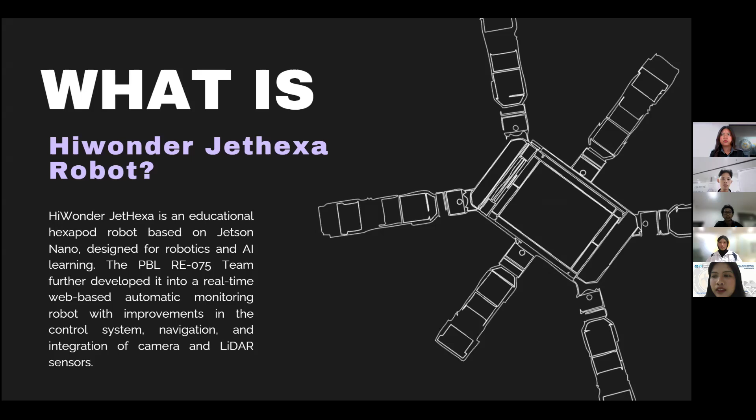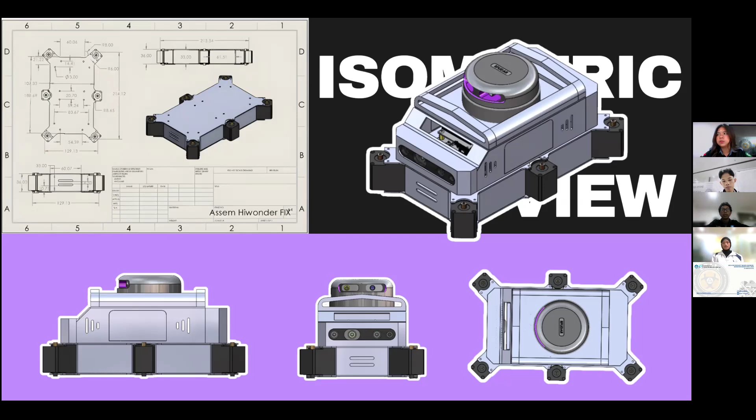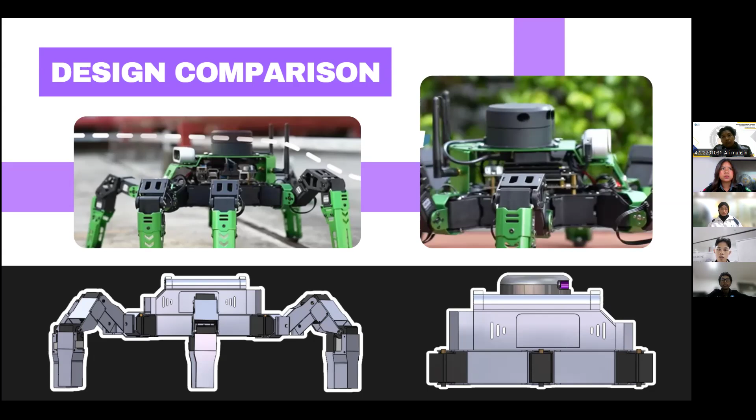In this slide, I will explain the latest design of the HiWonder arm robot. The development I worked on focused on the mechanical design, especially the arms and legs part. The new design looks more closed compared to the previous one. The reason is to protect the components inside, especially the servos and wiring, from water splash or dust when the robot is tested outdoor.

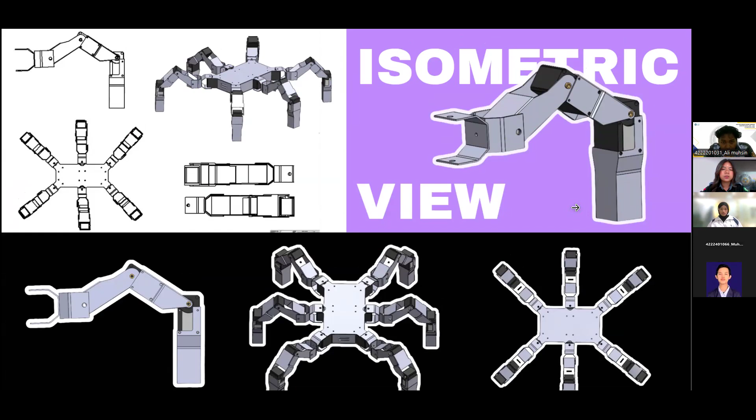Here's a comparison design, the latest one and the previous one. This latest closed design also helps reduce overheating from the sun when the robot is used outside.

From the appearance, the new arms look tighter and stronger because I combined several parts, such as: the bracket mounted to the servos at the main body, the coxa mounted to the bracket, the servos mounted to the coxa, the femur mounted to the servos, the servos mounted to the femur, and the last is the foot mounted to the servos. All these parts are connected using HX-35H servo bus motors to keep the movement precise and strong.

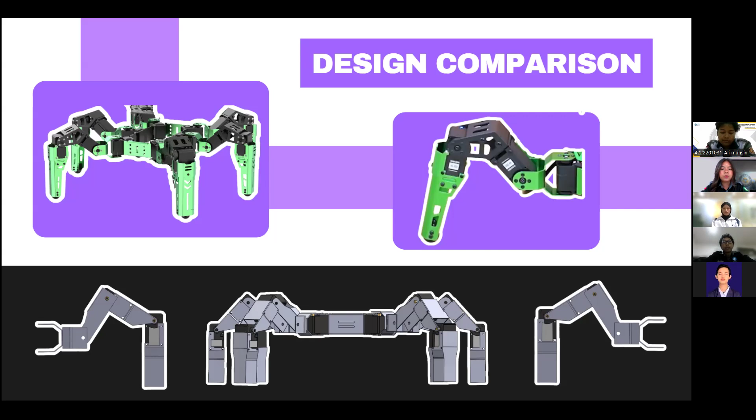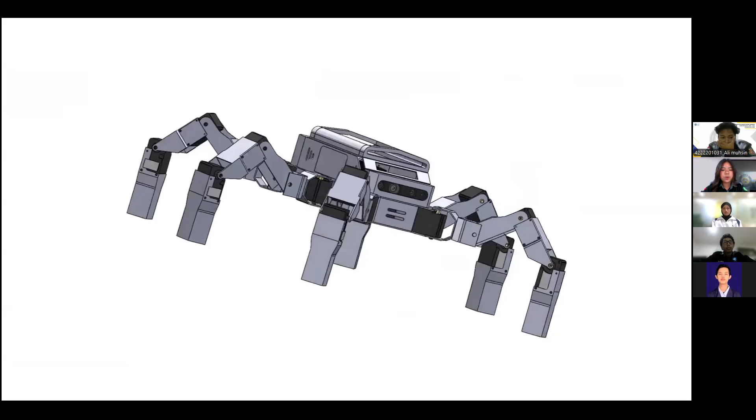My goal after my term is to simulate in Webots and analyze the current design for flaws before we proceed to new design fabrication.

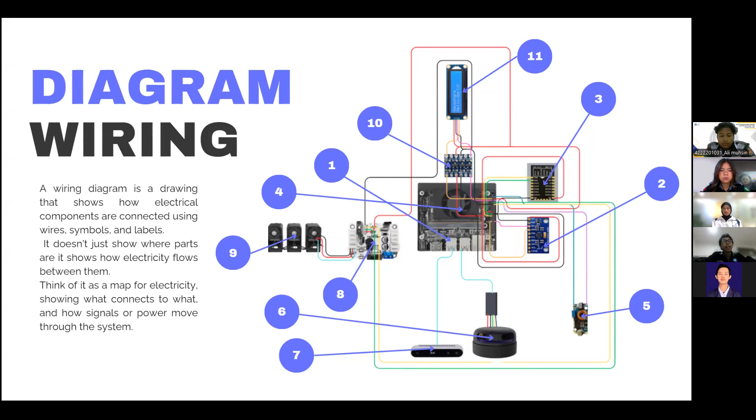Okay, I will give a presentation about electrical design, and first I will explain my wiring diagram. As you can see, it shows how to wire each module to the Jetson. For the components, you can see the names in the next slide.

We should use one Jetson Nano, one MPU 9250, ESP12S, Jetson fan, a buck converter, LiDAR, the camera, servo controller, bus servo motor, level shifter, and LCD. For each component, you can see the quantity here.

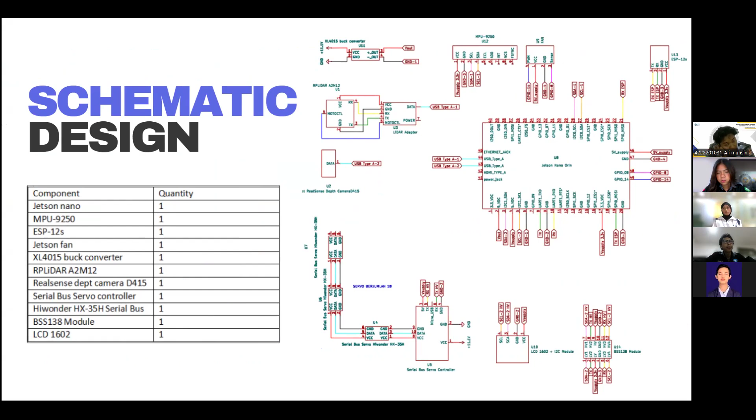For schematic design, I will explain our wiring approach. To supply the Jetson Nano, we use 5V DC pin number 2, and for GND we use pin number 6 GND from the buck converter, because Jetson Nano can only take a 5 volt supply.

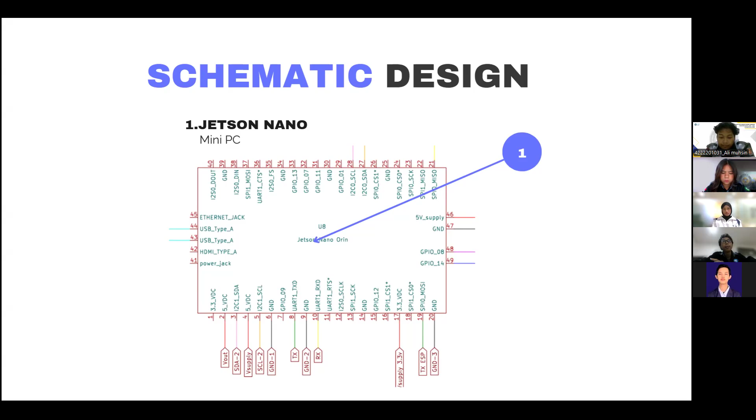MPU supply directly from Jetson Nano. Jetson fan supply directly from Jetson Nano, and ESP supply directly from Jetson Nano. For the buck converter, P in plus and P in minus...

connect to the battery supply, and P out plus and P out minus connect to Jetson Nano. For LiDAR and depth camera, they connect directly to the Jetson Nano.

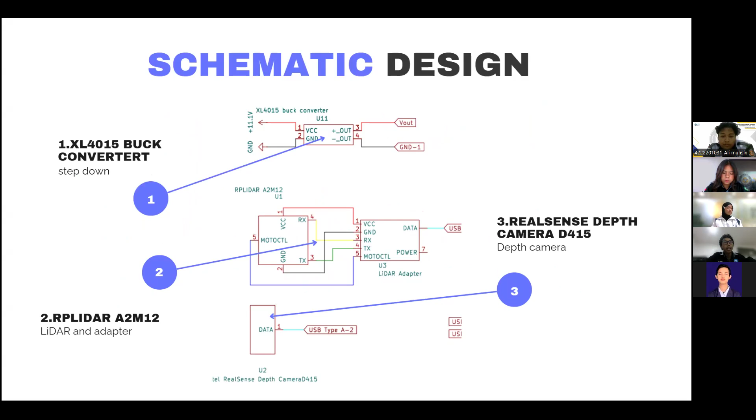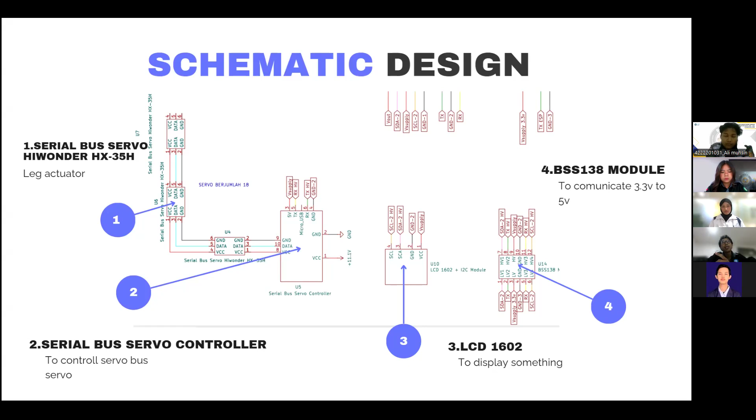Next, for the servo, first connect the servo to the servo controller, and the servo controller gets supply directly from battery and is controlled by Jetson Nano, because the servo controller needs high voltage to turn on the servo. The LCD connects to a level shifter, and the level shifter connects to Jetson Nano, because the LCD communicates at 5 volts, and Jetson Nano can only handle 3.3 volts.

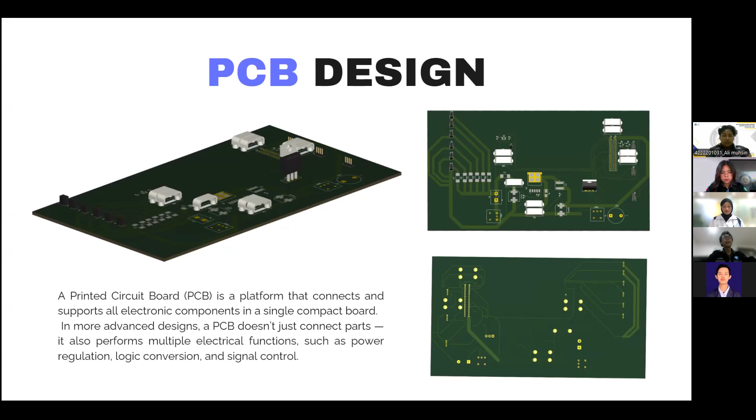If we still choose to make an integrated robot instead of a modular robot, I designed a PCB to replace the PCB in the JetHexa robot. This PCB has 5 main functions, which I will explain.

As you can see in zone number 1, this is a terminal for the servo serial bus driver, for controlling the servo. In zone number 2 is a buck converter. In zone number 3 is a level shifter plus terminal from Jetson Nano. Number 4 is a low voltage buzzer, and number 5 is a voltage divider.

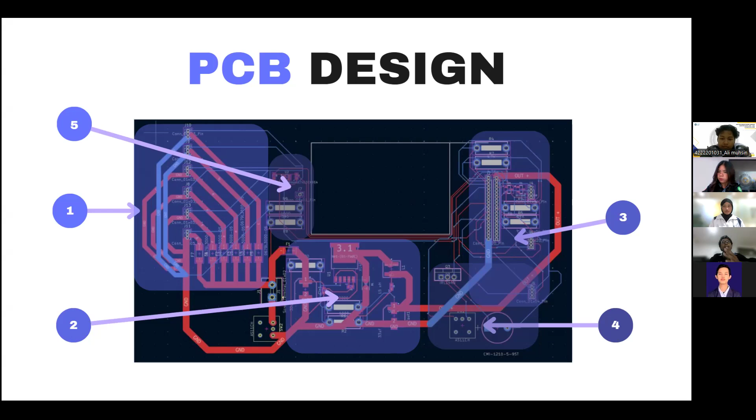This function is to check how much battery is spared, how much battery is left. My goal is to make a new design schematic to remake the JetHexa robot. Thank you.

In JetHexa navigation, I developed JetHexa from a manual control robot into one capable of performing real-time obstacle avoidance and multiple point navigation by integrating LiDAR data into ROS and improving the navigation process. The robot can now detect obstacles and move safely between multiple target points without crashes or collisions.

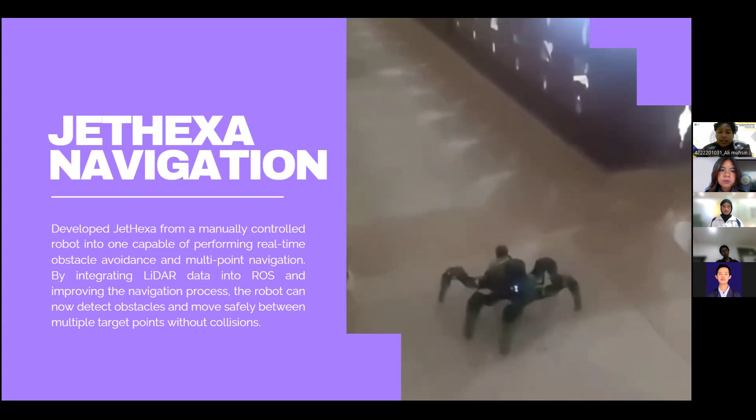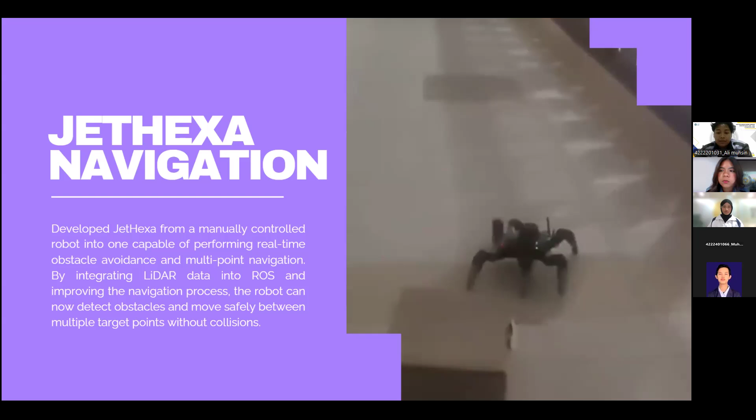The test video also demonstrates the robot successfully detecting and avoiding obstacles in its path in real time, proving that the obstacle avoidance system works effectively. My individual goal is to integrate the obstacle avoidance system with other subsystems to enable the robot to complete its main tasks efficiently.

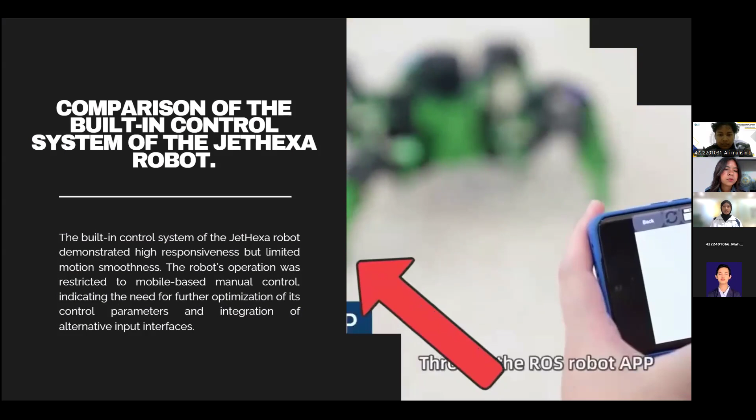This section covers the built-in control system of the JetHexa robot. The robot shows fast and responsive movement but appears less smooth and slightly unstable. Using the default mobile app control, it performs well but still needs parameter optimization for smoother and more stable motion.

This section explains the progress achieved in developing and implementing two operational modes of JetHexa: manual mode and autonomous mode. Manual mode allows the user to control the robot's movement through keyboard inputs, providing flexibility for testing directional and speed response. Meanwhile, autonomous mode enables the robot to move automatically in a square trajectory guided by an internal control system.

The system precisely manages direction, distance, and stability.

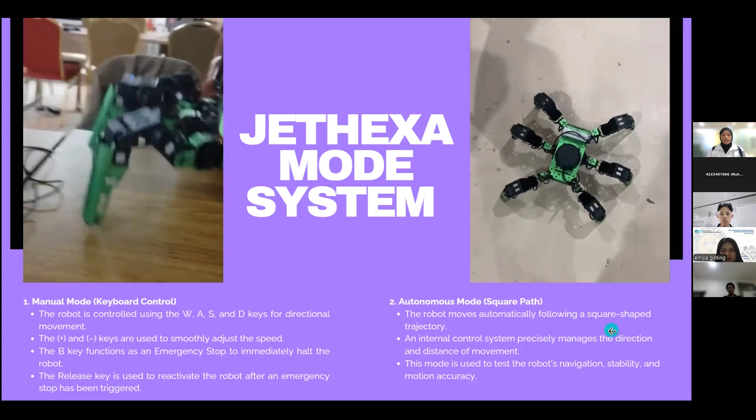My goal after midterm is to add a watchdog mode and integrate the built-in JetHexa module functions, using a ROS master to make the robot stop safely. In the next step, I aim to implement a kinematic mode to improve motion control.

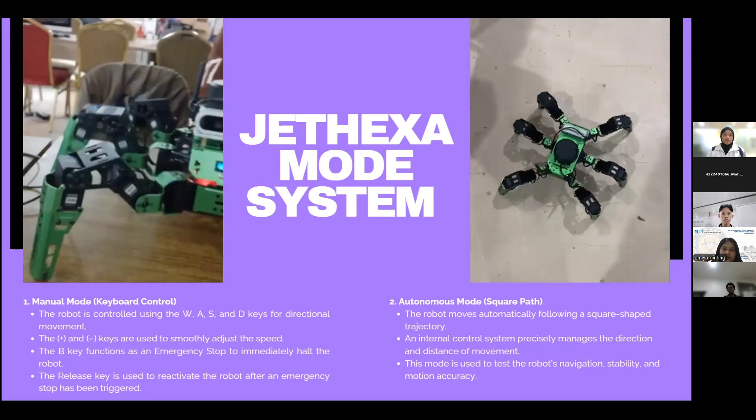Next up, I handled the program for SLAM, Gmapping, and SLAM and autonomous navigation. Currently, my progress in SLAM and autonomous navigation is in the mapping stage.

I made a map of one of the rooms, in the lobby. I made the system. You can see the current system from the Gmapping of the Hiwonder, its range and also the sensitivity is very low, standard for this, because this robot is for educational purposes.

One of the things that I used from the module is the design of the URDF and the recording of the maps. So I made the mapping and controller, but the design and the recording of the map, or taking the map picture, is from the Hiwonder itself.

The things that I developed is making the map more responsive and accurate, with additional development allowing the robot to know its exact position, like the starting and current position. This is the recording of the mapping process.